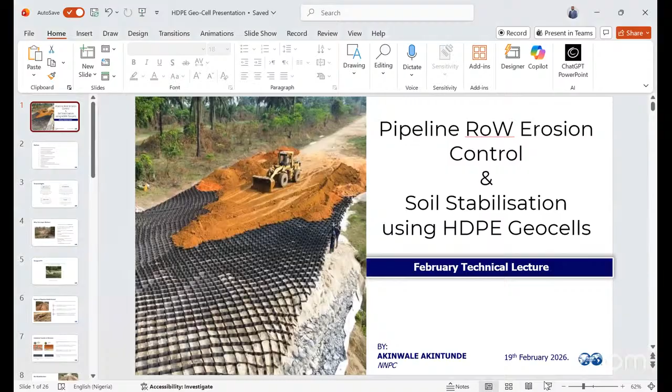All right, good evening once again. Apologies, I'm dressed this way because I'm currently in a remote field location, and it gives me joy to share my experience on these subjects with professionals like myself. Kindly confirm once again that you can see my shared screen and that you can hear me and that I'm good to go. We can see your screen. I can see your screen. I can hear you. You may just put the presentation, the slides on presentation notes. That was all. All right. Perfect. All right. Thank you. Done that. All right. Thank you very much.

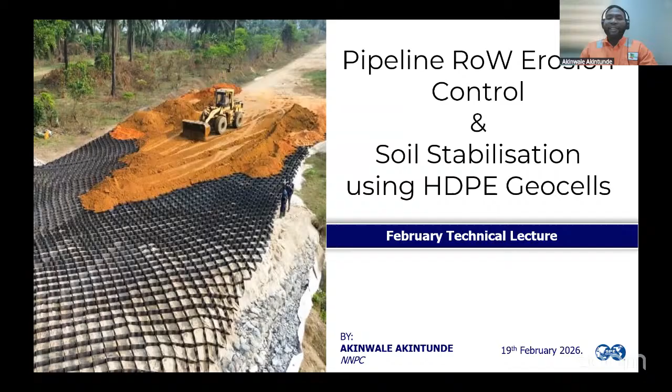I'll be presenting the topic: pipeline right-of-way, erosion control, and soil stabilization using high-density polyethylene geocells. Standing on existing protocols, you have been told that we need to be snappy, so I'll try as much as possible to do that. So this is my outline. I'll just take some 5 seconds for you to glance through them.

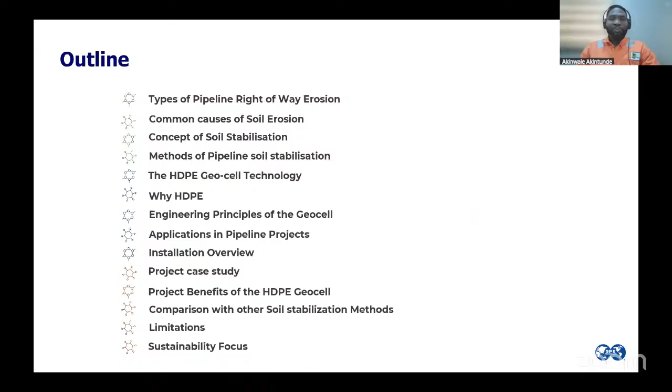All right, so I'd like to lay some foundation based on the topic that we have before us, and I'd like to take us through the basic definition of our key terms.

The topic speaks to HDPE geocell, soil stabilization, and right of way and erosion. So I'll just dive in.

The HDPE geocell, by the way, HDPE stands for high density polyethylene. It's a 3-dimensional honeycomb structure made from high density polyethylene, used to confine soil and improve strength and prevent erosion. Whereas soil stabilization,

simply put, is a process of improving soil strength, basically the engineering properties of soil to make it durable. This can be achieved through mechanical, chemical, or geosynthetic methods, to enhance the load-bearing capacity, make the soil more compact, and reduce possible erosion.

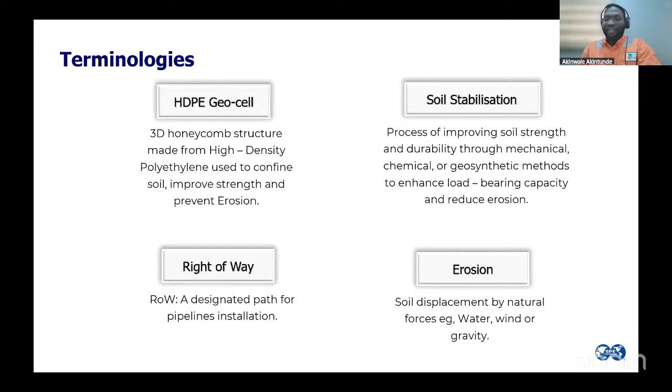Right of way, captured as ROW, is basically a designated path for pipeline installation. And obviously we all have an idea what erosion is - basically it is the displacement of soil by natural forces.

So this topic is important to me, and I'd like to share with you why this topic matters. First, take a look at the picture. On the left-hand side you see an exposed pipe, right? That happens to be a right-of-way, and you can see the level of erosion that has occurred there.

This topic matters to us because in this part of the world, oil and gas pipelines are installed below ground. Unlike in Europe or other parts of the world where you see pipelines installed at the surface, here in Nigeria majority of our pipelines are installed below ground.

This topic is important to us because soil cover protects pipelines from exposure to vandals, heavy rainfalls, flooding, mechanical damage, etc. Also, it is important because erosion along the right-of-way threatens pipeline integrity, obviously, right?

And it is important also because loss of soil support creates pipe sagging and joint stress. We know that our pipelines are welded, the line pipes are welded together to form a long piece of pipe, to flow whatever fluid it is designed to flow.

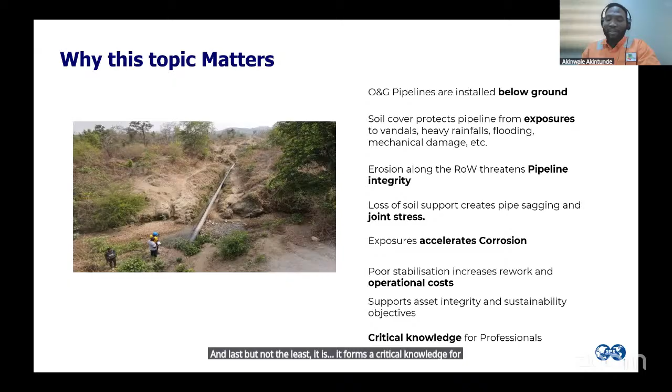And last but not least, it forms critical knowledge for professionals like you and myself. So can you just imagine seeing the picture being displayed - that practically is a sagging pipe from one end to another. Obviously, this pipe has been eroded.

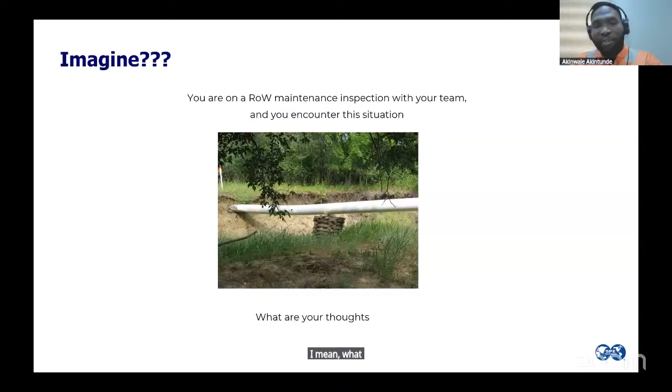The soil cover has been washed away, and the soil support beneath has been washed away as well. So if you are on a maintenance team for inspection and you encounter this situation, what are your thoughts? What really comes to your mind? This is just to paint a picture in our minds while we proceed.

For the sake of this topic, I would like to dwell briefly on each of these. I'll talk briefly on erosion and the types of pipeline right-of-way erosion that we usually encounter. You need to understand that I have narrowed the topic of erosion in this context to pipeline right-of-way. Right-of-ways are particularly vulnerable to different erosion types.

The first type of erosion that our pipelines are exposed to is surface erosion. Basically, this is the gradual removal of topsoil, which can be caused by rainfall, runoff, or wind.

Also gravity as well. Also, we have gully erosion - basically this is the formation of deep channels, created by concentrated high-velocity water flow.

And the third, which can be deadly, is subsurface erosion. This is hidden because obviously we cannot see it at the surface. There are hidden soil losses occurring beneath the surface. It is weakening the ground support and often remains unnoticed until a major challenge occurs.

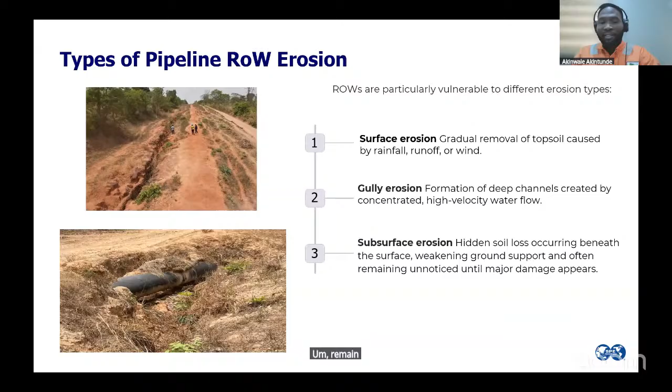Basically there are two causative agents for pipeline right-of-way erosion. The first is human-induced. While humans do not have a direct impact on the soil to cause erosion, human activities such as deforestation, urbanization, and mining can accelerate soil erosion.

Also, we have natural agents like I talked about earlier: water, wind, and gravity. We know that intense rainfall and surface runoff will wash away soil cover, and at that point the pipe becomes exposed, and from there it can only get worse for the pipeline underneath.

Construction-related soil disruptions, such as inadequate backfilling which leaves the soil loose and unstable, can also cause erosion. During pipeline construction, after the pipes have been welded together, the next stage is to excavate and lower the pipes beneath, then cover them back. In that process of covering, we disrupt the soil formation, and while covering the pipeline with earth, we create more voids of air and maybe water. That practically is the leeway for erosion to start.

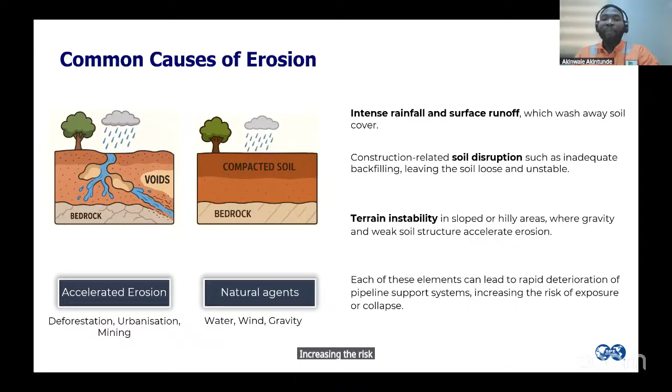So what's the concept of soil stabilization? Soil stabilization is aimed at improving the engineering properties of the soil. We know that in the soil structure, the presence of voids helps microbes which live within the soil. Voids would mean pores, and those pores also create an avenue for oxygen to reach plants and help them grow.

But where in excess, or where the soil is naturally weak, it becomes easy for this soil to be displaced by hydraulic forces, in this case water. Because those voids become so large in size that there is no longer friction between the soil particles, it's easy for the soil to be washed off. So basically, reducing voids is essential to preventing erosion, as this will slow down water movement. It will enable soil particles to interlock better, making the ground less susceptible to scour and displacement along the right-of-way.

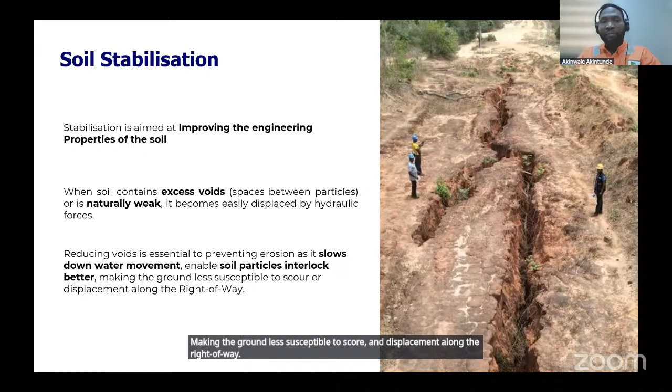So basically, I'll just dash through these three soil stabilization methods. The first is compaction. The idea of compacting the soil is to first drive away excess voids in the soil, and in doing this we are trying to increase the shear strength of the soil. Shear strength talks about the soil's resistance to lateral movements or forces that want to deform it by moving it away. So when we compact, the soil's shear strength is improved and it makes it more resistant to movement. Compaction also enhances cohesion and friction, which prevents particles from being washed away. It improves density and compaction, creating a firmer foundation around pipeline corridors.

The second method is mechanical confinement, and I speak to this with respect to pipeline right-of-way. For example, geocell, which we will talk extensively about in the next slides. The geocells prevent lateral soil spreading and hold soil particles tightly together.

And the third would be chemical additives. These basically bind loose soil grains and fill micro voids. Examples of chemical additives would be fly ash, cement, and so on and so forth. Basically, this helps to bind the soil together.

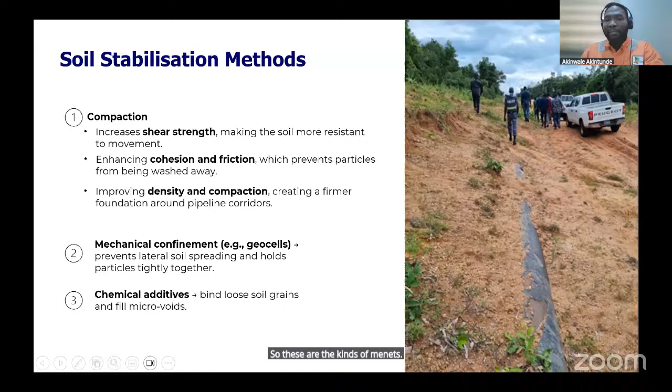Looking at this picture, you'd see an exposed pipe, and you see that a part of the coating of the pipe has actually been chopped off. This has already exposed this section of pipe, and you know that corrosion has already set in. So these are the kinds of menace that this topic is providing solutions to.

So I'd like to take a little pause here for us to take in all that I've said. I've talked about soil erosion as it relates to pipeline right-of-way, and I've talked about the concept of soil stabilization and why it is important and why we do it. So the next thing I'll talk about is the crux of today's meeting, which is the HDPE geocell technology.

We call it panels, and it is foldable. As soon as you want to spread it over, once the right of way area is prepared, it is being expanded. And once you expand it, it forms cells, and that's where the name comes from, geocell. It forms cells, as you can see, and each of these cells is perforated.

Within the confinement of each of these cells is where the earth is being filled into. The idea of the perforations is such that even if the earth fill absorbs water, the water can easily, under very low velocity, find its way out of this formation without washing away the soil. This is the game changer for protection of right of way against erosion.

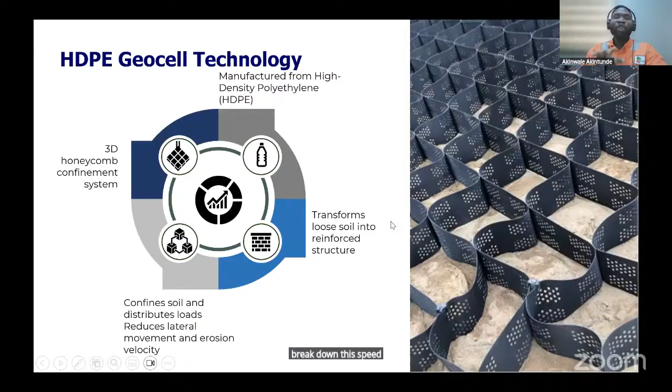So the runoff velocity is being reduced to the barest minimum, because the geocell has been able to help break down this speed. So why the choice of high density polyethylene? We also have low density polyethylene, right? So why the choice of high density?

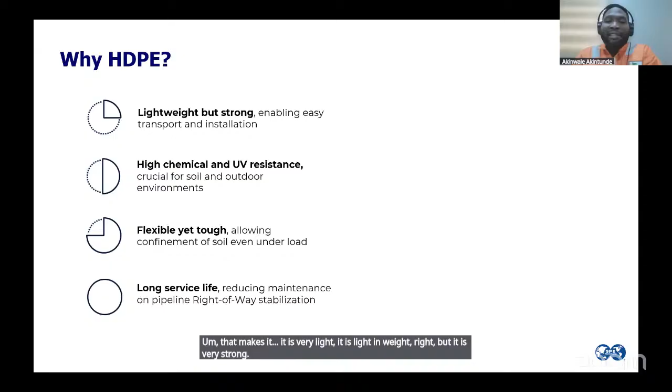First is because of the density to strength ratio. That makes it very light in weight, but it is very strong. And this enables easy transportation and installation on site because of its lightweight.

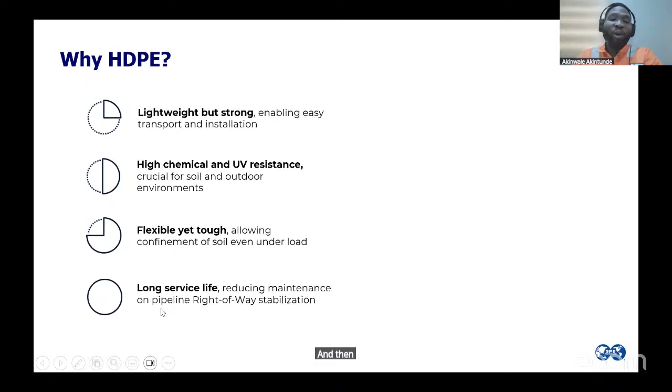It has high chemical and UV resistance. Practically, this makes it very suitable for outdoor use, and it has high resistance against environmental hazards, such as environmental exposures. And then it is flexible yet tough - I've spoken about the density to strength ratio. It allows confinement of soil even under load, and it has this long service life, reducing maintenance on pipeline right of way stabilization.

Going forward, I'd like to speak quickly to engineering principles of geocell stabilization. Basically, we've talked about increasing shear strength, and I told you earlier what shear strength is all about. The geocell material helps to stabilize the soil by improving the bearing capacity of weak subgrades, so this makes it find usage in access roads, creation of access roads where the subgrade is very weak.

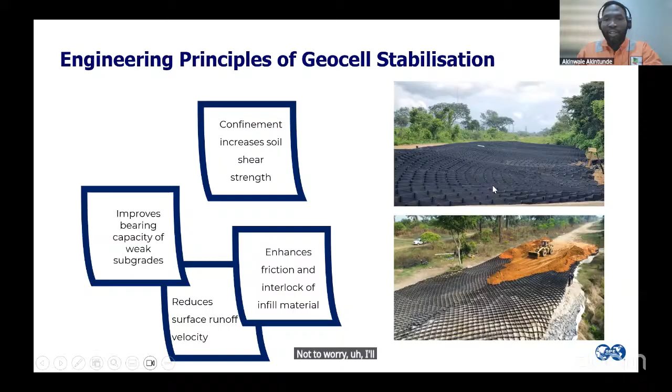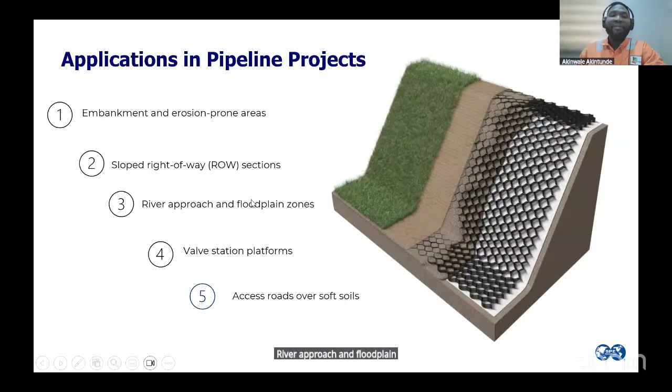So all these properties make the geocell suitable, and make it find use in embankment projects and erosion-prone areas, slope right-of-way sections, river approach and floodplain zones, valve station platforms, and access roads over soft soils.

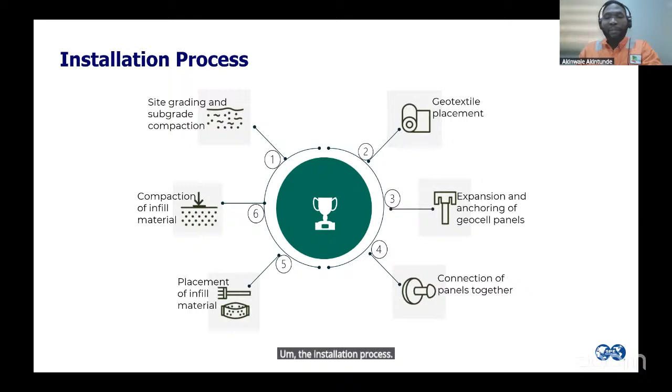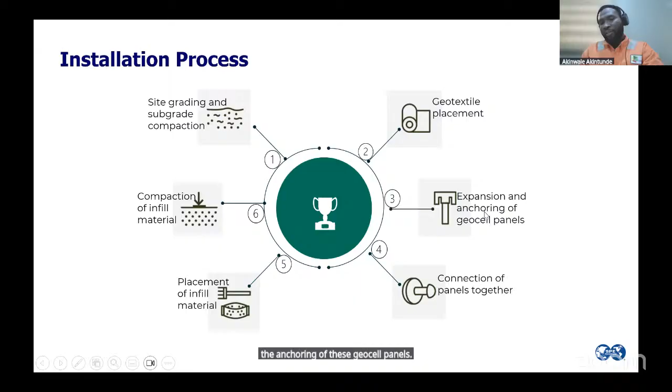So below is the installation process. I would not like to dwell so much on this - the previous slide I had already spoken about the different layers, which basically talks about the installation process. But key to this installation process is the anchoring of these geocell panels. So I can say that the beauty of the

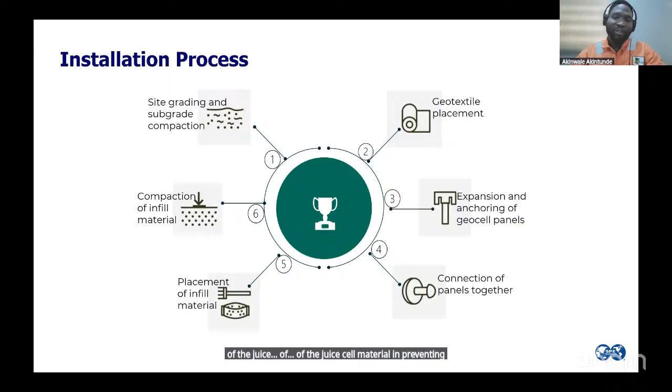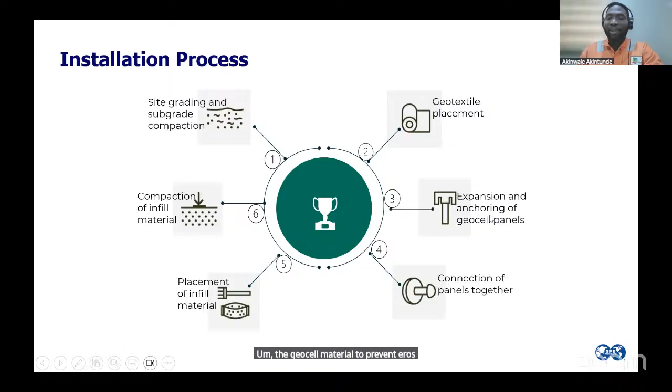geocell material in preventing pipeline right-of-way erosion lies in the anchorage, because the anchor makes it stable to the earth. And if that anchor is not properly done, the erosion will eventually wash away all the soil and the geocell material inclusive. So that is why we need to take this very seriously. The strength of the geocell material to prevent erosion lies in the anchorage to the ground, and also the connection of the panels together. I mentioned earlier that it comes in different panels, and the panels are tied one to another. So I'd just like to dash through this project case study.

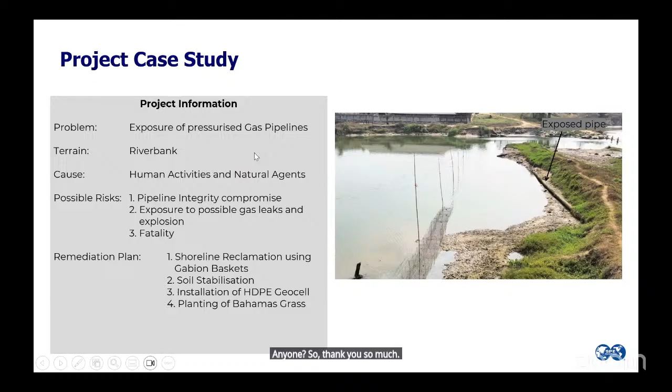So this is a project case study that I supervised. I was privileged to supervise it.

This is the project site. It's a riverbank area, and you can see this arrow showing an already exposed pipeline. The reason why it is exposed is not far-fetched. You see the environment, you see that it's at the riverbank, and the velocity of water hitting the right-of-way obviously would wash that off. So the problem is that the pipeline is exposed.

It's a pressurized gas pipeline, and this involves both human activities and natural agents. The possible risks this area stands is that there's a compromise on the pipeline integrity, because obviously the soil cover has been exposed and we cannot ascertain the integrity of that pipeline. There's also exposure to possible gas leaks and explosion due to corrosion, and then fatality.

What were the remediation plans that we put in place? The first was we had to reclaim the shoreline using gabion baskets. I'll show you what that looks like. It's basically an interwoven basket of galvanized steel, filled with hardcore, huge stones, to reclaim a portion of land and also to form protection for shore areas.

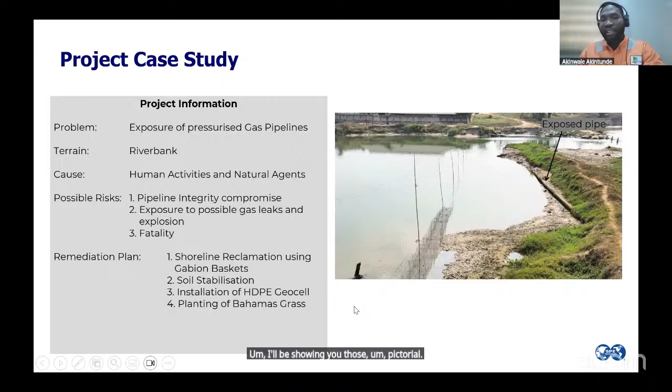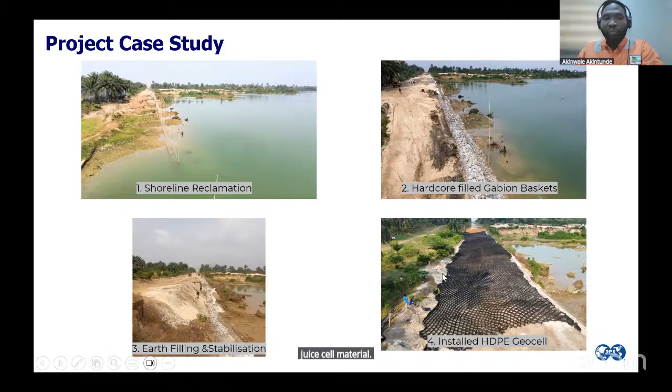After the geocell was laid, the next thing was to start filling the cells with lateritic soil. The sixth frame shows that filling of the installed geocell with lateritic soil, and this is the completed filling. The eighth frame shows us the completion of compaction.

After the geocell was filled with laterite, the next thing we did was to stabilize that new filling. When we do compaction, the essence is to ensure that the voids within the soil are expelled as much as possible to make the soil more compact. That is what was done here in frame 8.

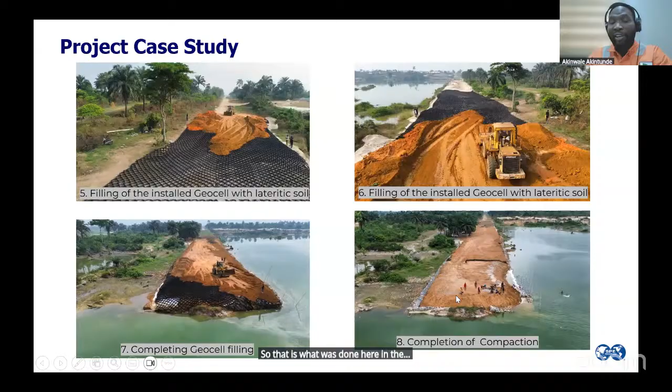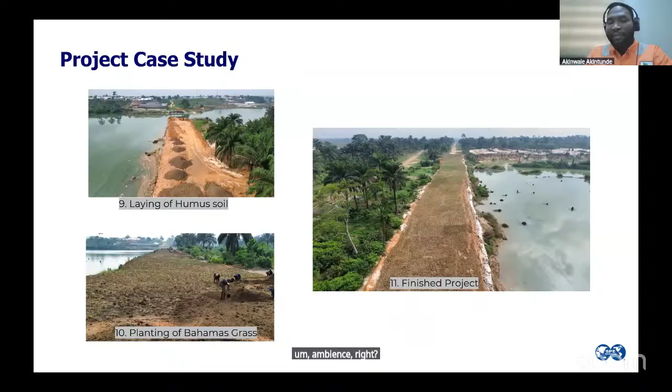So what are the project benefits of using the geocells? Basically it helps improve slope stability, reduce erosion and soil displacement. It lowers life cycle maintenance costs, and it can be installed faster, unlike using concrete solutions.

Especially in these kinds of locations, transporting the elements you need to make concrete to remote locations might be very tedious and Herculean. So this is much faster and it solves the problem. Another benefit is that it enhances HSE and environmental compliance. From the picture you saw, the site was returned back to its original state, with the planting of grass on it.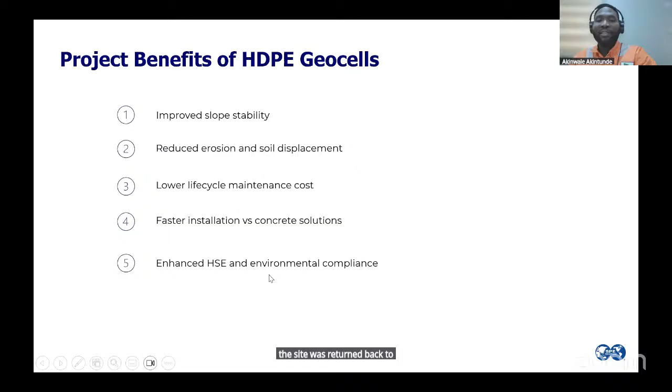So I like to compare the idea of using HDPE geocell with other stabilization methods. I've spoken to us about geocell, that it is best practically for slopes and right-of-way protection. Based on experience, the cost is moderate, and the flexibility is the topping on the cake, right? It's highly flexible, you can work with it, and because of that it has a very fast installation speed.

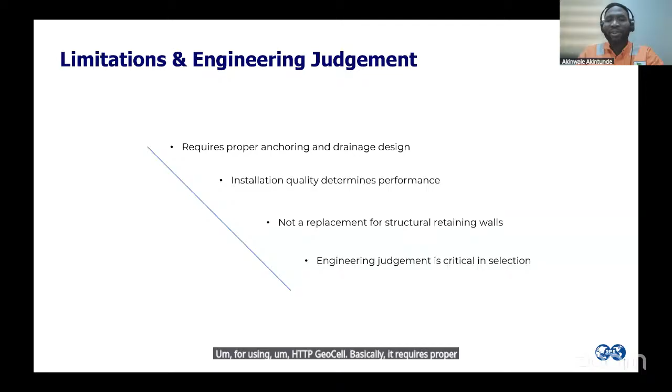So the limitations for using HDPE geocell: basically it requires proper anchorage. I told us earlier that the strength of the HDPE geocell basically lies on the anchorage to the ground, so the anchorage needs to be properly done. The installation quality determines the performance, obviously. And it's not to be a replacement for structural retaining walls. Like I said earlier, engineering judgment is critical in the selection.

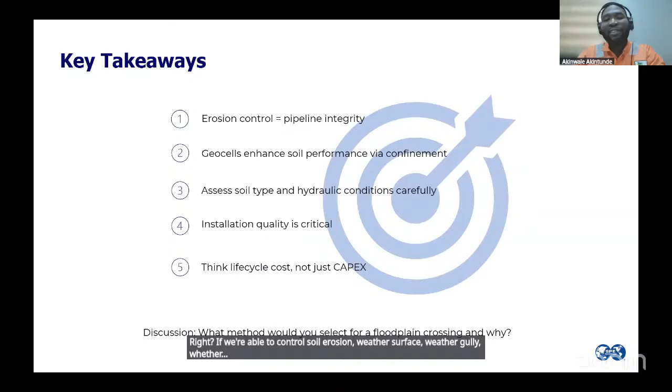So I've come gradually to the end of my slides, and I'd like to take these key points to note. First, that erosion control equals pipeline integrity. If we're able to control soil erosion, whether surface, gully, or subsurface, what we are doing in essence is ensuring the integrity of our pipelines.

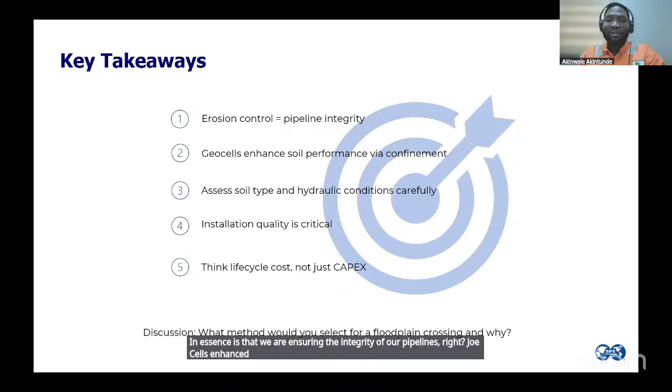Geocells enhance soil performance via confinement. We saw that. We need to assess soil type and hydraulic conditions carefully. The fourth point is that installation quality is very critical, this can never be overemphasized. And the fifth point is that we need to think life cycle cost and not just CapEx.

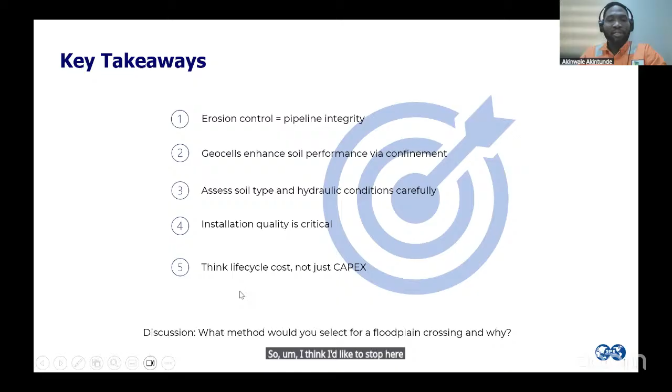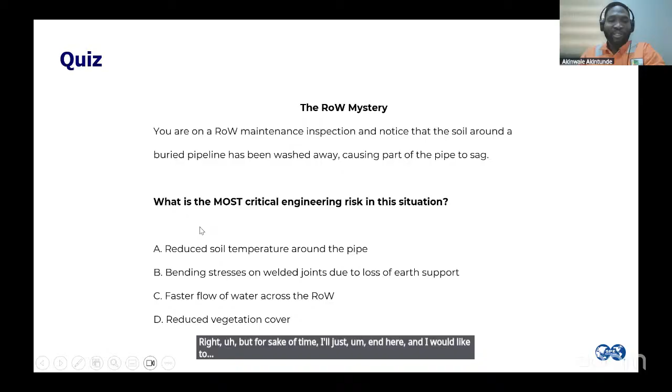So I think I'd like to stop here because of time. There was supposed to be a discussion, and I think there's also a quiz, but for sake of time I'll just end here, and I'm happy to receive questions. Thank you for listening. Over to you, my distinguished moderator, thank you.

Thank you very much, distinguished engineer. This is very loaded, it was timely and as well impactful. In fact, I can say I've learned enough to supervise any erosion control work that might be applying HDPE anytime soon. I've learned quite a lot in this very short time.

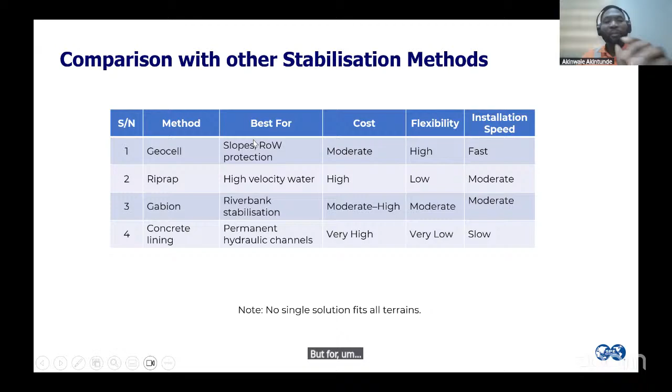So practically, the choice of HDPE and why not LDPE is practically simple, right? Both of them are byproducts of crude oil. LDPE finds usage in plastics and other manufacturing, but for right-of-way protection and for the manufacturing of geocell material, HDPE material is what is being used. I have never come across geocell material that's been manufactured with low density polyethylene. I was just trying to open our minds to the fact that there is something like low density polyethylene, but for right-of-way stabilization and for geocell manufacturing, it is HDPE that is being used. I've not come across manufacturing that is being done with the other one.

Then to your first question, so practically, you can decide, without engineering judgment, without proper decision making, to use any of these for right-of-way erosion control, but you end up spending practically maybe more if you choose the wrong method to solve the issue of soil erosion on the pipeline right-of-way. You probably spend more, waste time, and then probably contribute more to our carbon footprint and all of that.

But for other methods that work, just like I said earlier, you can decide to use any of these. You can decide to go for riprap. Like I said, riprap basically involves placing big stones on the right-of-way to help break down the velocity of the running water. You can decide to install gabion baskets as well. It will do the same thing, but is it economical? Are we optimizing our funds? So practically, that is why the caveat is there that we need to use engineering judgment to pick the best option.

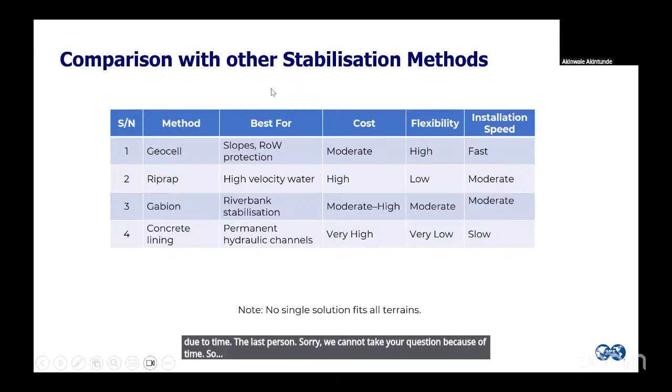Wonderful lecture indeed, okay just a quick one. I think while presenting you talked about sustainability, and from the pictures you showed I was just thinking, this is a plastic, right, and it's subject to deformation over time. I would want to ask, because you mentioned it can be reused, so I think you're talking about recycling and the rest. I believe this will have some environmental limitations, and recycling might also be cost implicating. So given these long-term deformation and recycling or environmental limitations, what design measures did you consider as an engineer to minimize this long-term risk, so that you won't see your work deformed over time, especially when subjected to high load or something? Yeah, thank you.

All right, thank you so much for that question. So practically, the right of way is a designated part that is meant for pipeline installations, right? It is not meant for any other thing apart from that. So it is not expected that any other loads come on it. And then talking about the sustainability aspect of installing geocells, practically that is in the context of comparing the volume of geocell you will require to cover a certain expanse.

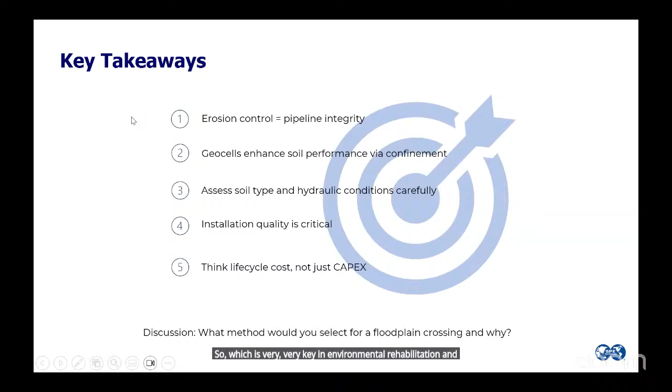Engineer Nelson, you will see that after the application of the geocells and the laterite filling, there is a compost soil that is applied that supports vegetation, which is very key in environmental rehabilitation, and it restores the original ecosystem of that environment. And it allows for pipeline segment repairs. If you use permanent solutions like concrete, it will be very difficult for you to expose those segments that you want to work on. That's why you use materials that are flexible, you can easily remove and reinstall.

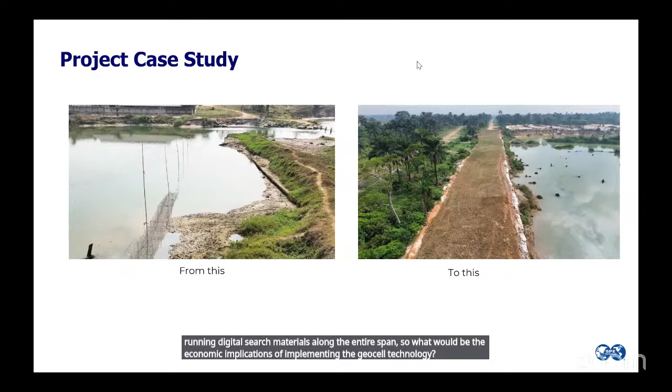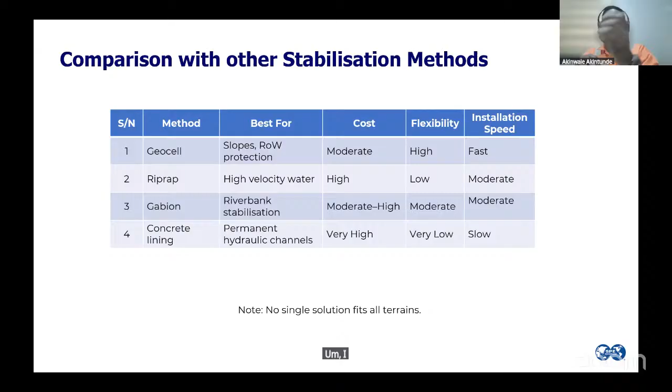Thank you so much. So the idea is that for the geocell, if you see, I shared a table the other time. So mind you, we use the geocell solution where we have issues of erosion. So if you are installing a pipeline, if it's a greenfield installation, provided all the necessary soil stabilization has been done, compaction of the subbase and all that, and the pipeline is installed and covered properly, and there are no excess voids, you can be rest assured that you might not have issues of erosion, washing away of your soil. But we deploy this method where we start having issues of erosion and all that. And practically from this table you see, and from experience, it is cheaper compared to other solutions, because practically you are just installing geocell.

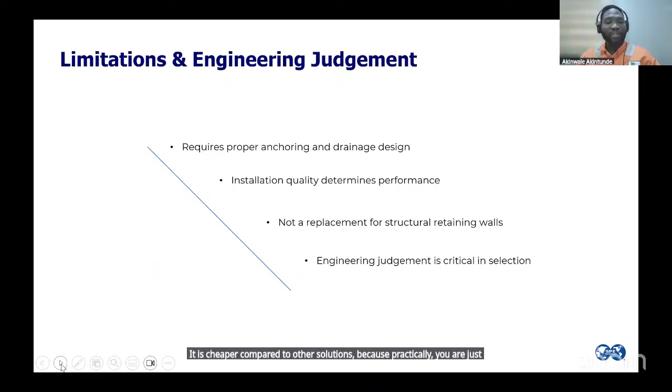It is very fast, and then you are again returning the environment back to its original state by planting vegetation on it. So it is one of the cheapest solutions so far.

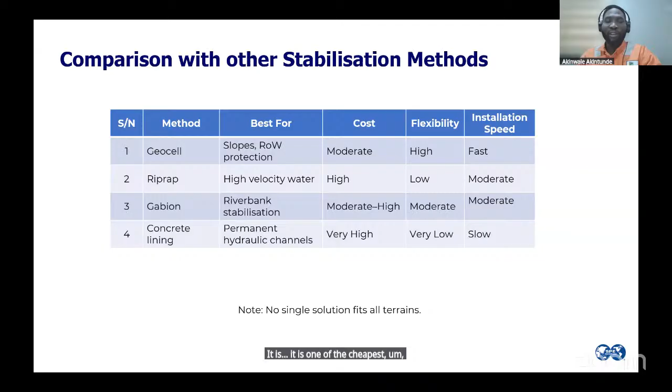Thank you. Sir, please, in just 30 seconds, can we answer this last question? What's the cost implication, particularly if deployed on a right of way running 100 kilometers and above? He has already answered the question. It's the same thing. Thank you, he has answered it.

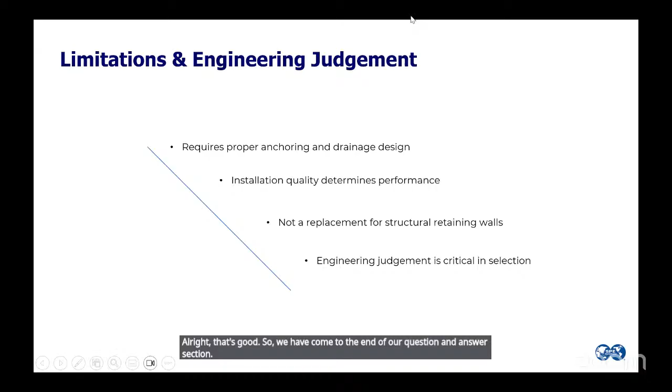So we have come to the end of our question and answer section. I hope even those that did not ask questions, the questions of others have covered the ones you may want to ask.

So it's time for key takeaways. The topic is very, very interesting, something we all need as fellow professionals, just like he said. He talked to us about the overview of erosion, how it happens, the implications, and everything. Then he brought to us the game changer of this technology. We can see that it is very, very interesting, even for your company. If something like this is not known, it can be a game changer, or if others have not even heard of it, it can be something you bring to their knowledge.

Finally, what I also want to add is, just like when Lucky asked the question, engineering judgment is very, very important, because with engineering judgment you will make an informed decision so that all the implications, you will bypass and avoid them. But when you do something blindly, when you are not informed, you end up losing what you don't expect to lose. And loss in our industry is something that should not be entertained.

So I think we have done justice to this section. Over to you, moderator.